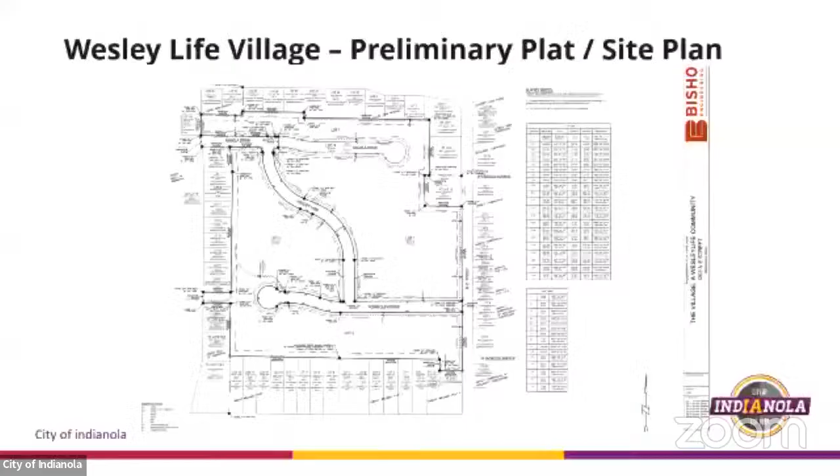Item 7A is approval of a preliminary plat for Wesley Life Village. The next two agenda items I'll be talking about together because they go hand in hand with one another. This is a request from Wesley Retirement Services Incorporated, represented by David Bentz with Bishop Engineering. The applicant is requesting approval of a preliminary plat and site plan for a residential facility, a group living facility at 1203 North E Street. The property is just over 33 acres in area.

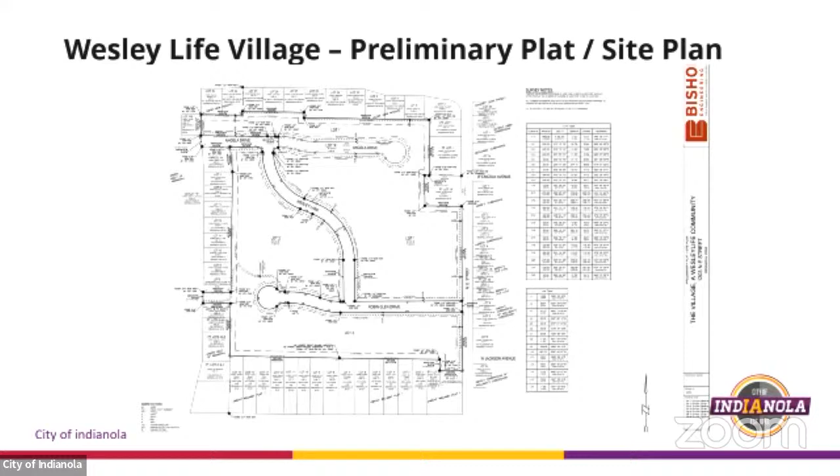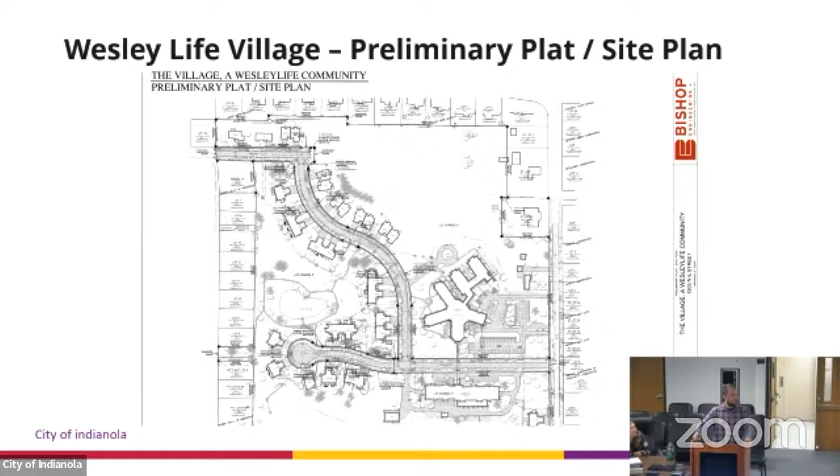The property is currently zoned PUD, and it is surrounded on all four sides by R1 single family residential. The site plan identifies the extension of one public street, Angela Street, which will be extended to the east. That will be the location for 14 duplex buildings for 28 total lots.

Each unit will be approximately 2,350 square feet in area. The site plan also identifies improvements to the existing facility to the south, which includes a new front entrance and a community room with cafe seating, just over 4,000 square feet in area. A 540 square foot area will be the new entrance.

Along the west side of the building will be a 10-unit transitional care addition that's 5,818 square feet in area, and a dining deck addition that's just over 1,200 square feet. Lastly, the applicant is developing a 3-story apartment complex at the south portion of the site, with 28 units, just under 20,000 square feet in area.

The lower level of that building includes 36 parking stalls. The trash enclosure is located in this general vicinity. The applicant is also proposing amenities such as a pickleball court, a dog park, a patio adjacent to the gardening area, and a bocce court as well.

Access to the site will be included in a number of different ways, including from Angela Street and then E Street on the east side of the site. Robin Glen is the north-south street that goes between, or kind of through, the facility there.

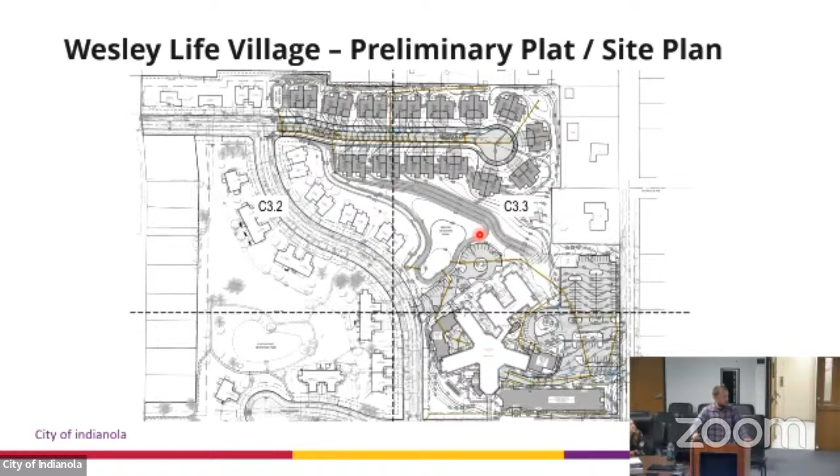Stormwater detention will be located in a pond at the center part of the site. A minimum of 25% of the project area is required to be open space, and they're providing 63.4% open space.

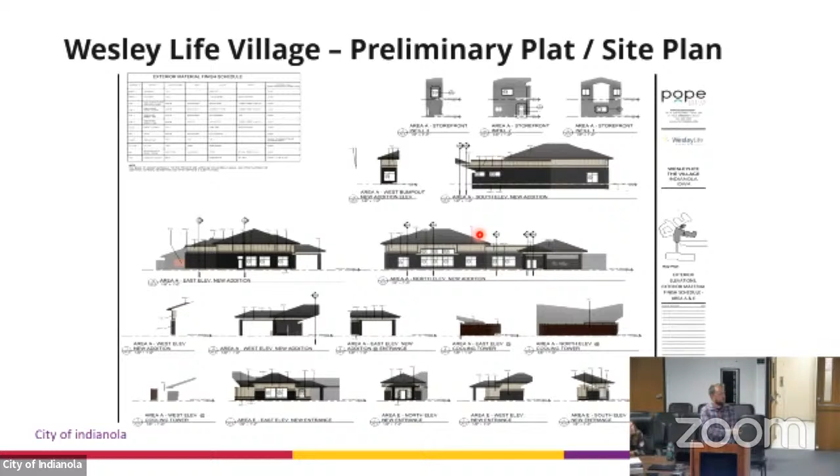The landscape plan is there. Colored elevations were provided for review. Those buildings are to be constructed predominantly of brick, fiber cement board horizontal siding, fiber cement board and batten, and fiber cement board panel, along with fenestration or windows. I've included some elevations for review as well.

And that's the apartment complex on the south side of the site. The site plan is in general conformance with our subdivision ordinance, zoning ordinance, site plan ordinance, and comprehensive plan, so staff does recommend approval. All comments have been addressed at this point, so there's nothing additional needed from an engineering perspective to complete the project. Staff recommends approval. We're happy to take any questions.

For the architect, developer, or representative, have you been talking to your neighbors? Any?

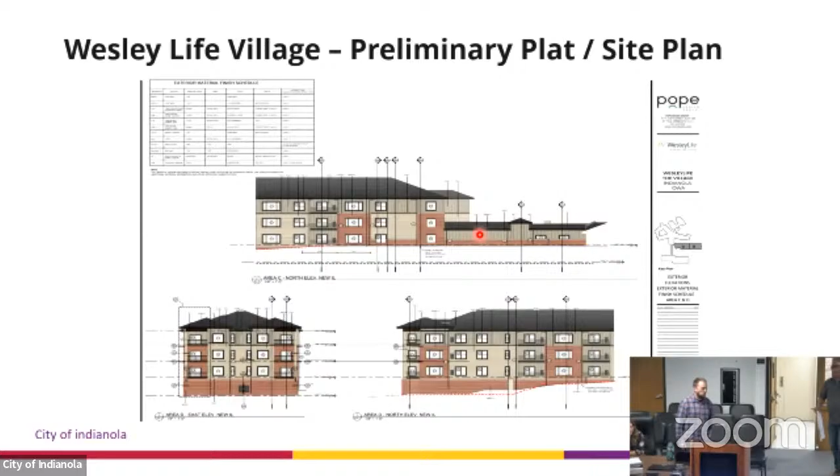Dave Bentz, Bishop Engineering, 3501 104th Street in Urbandale. Yeah, when we did the rezoning, we had neighborhood meetings. We came here about a year ago with a more intensive plan, and the neighbors showed up. When we came back through the whole process, we had another neighborhood meeting and pared it back a little bit. So yeah, we've had a lot of conversations with the neighbors, and I think this is pretty much in conformance with what we had for the PUD.

Can you tell me something about the water flow into those retention basins and where the water is ultimately going to go? It pretty much goes the same way it goes today. The south end that flows off undetained today, we've decreased that area, so there's going to be less water flowing off undetained. The large detention basin there, where that pinkish dot is, let me come over here.

Right now you have a pretty good sized area flowing off this way. We've decreased that, so you've got a smaller area, and we're detaining it. Then it's flowing down that road. You've got a lot of water that comes down through here, so we're over-detaining in this area, releasing less than what goes off today, and then it goes through this pond, out the way it goes today.

That's a dry pond, so to speak. This one's dry, this basin's dry, this one's wet. And the north one? That's a dry one. Okay, thank you.

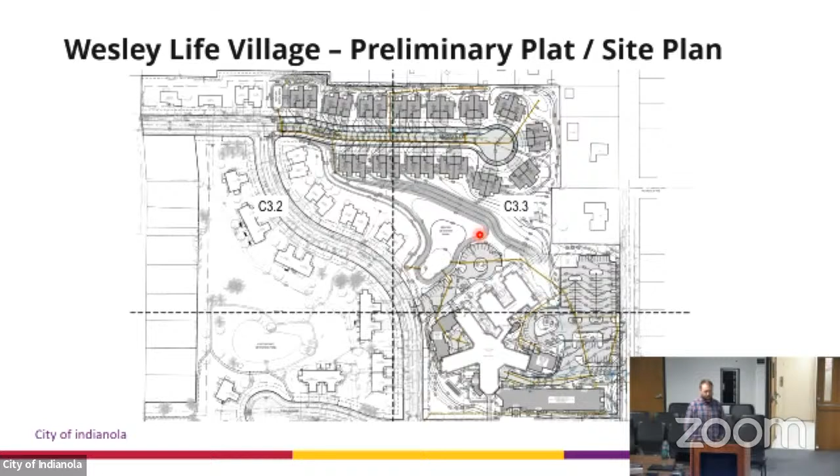Comments from the commission? On the original plan, there were some comments, particularly from the neighbors to the north, about the height of buildings. How tall are they going to be, those duplexes?

If it says on the elevations here... I don't know. I'm Troy Porter, I work for Wesley Life. Please go to the mic. The duplexes won't show up on the elevations, but they're all single story. Excuse me? They're all single story. Okay.

Anyone like to make a motion to approve the preliminary plat for Wesley Life Village? I make a motion to approve the preliminary plat. I'll second. Roll call vote, please: Richie, yes. Harris, yes. Darling, yes. Vice, yes. Nate, yes. And Piper, yes.

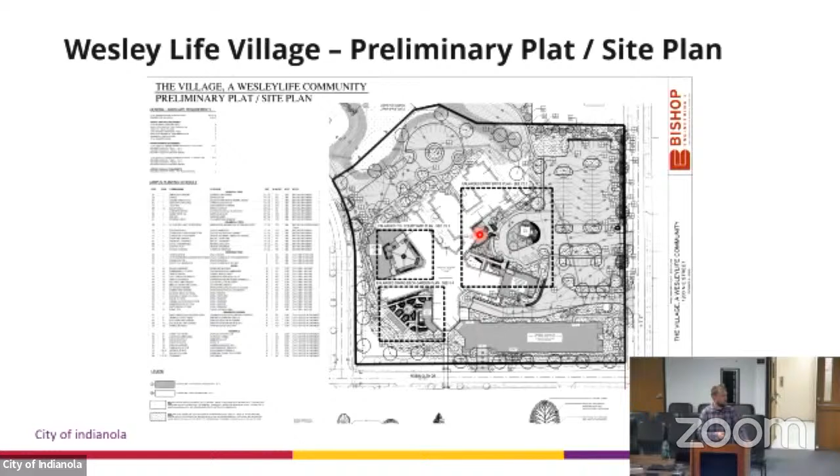Okay. So we agreed with the neighbors to do some extra plantings here that weren't really required since it's residential to residential, but we did that along here too. And I think originally we had a road coming down through here, which was a concern, and we still kept those trees in even though we removed the road.

Yeah, there'll be a punch list at the end, will they all be in that exact spot? Can't guarantee it, but I would hope so. A lot of times they don't have them staked out, so they're not exact. So we'll perform a landscape inspection as part of the process for them to get a CO.

We'll make sure all the trees and shrubs are in place at that time. This wasn't a city requirement, but the residents currently living here that are part of Wesley wanted some more screening too, so we added some, kind of like what we did up here, in the back of those units. They want the additional screening there too. That was just an internal Wesley conversation. Those are the existing Wesley units, yeah, right, they're just internal, we did the same screening between units.

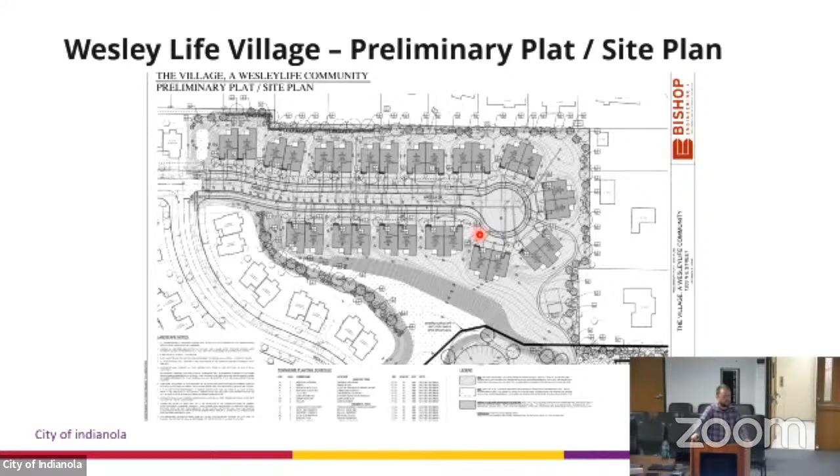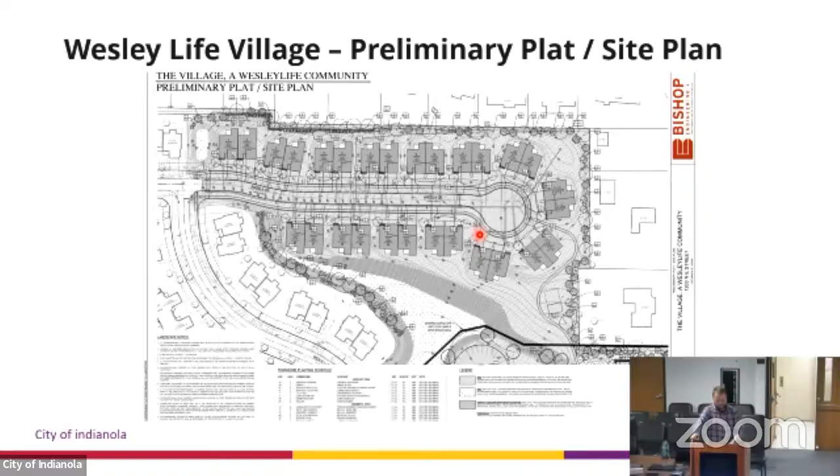There is a list of acceptable trees, is that correct? We list all the species here. That's hard to read, how many they are. I can't read them either. Looks like there's more list than that. We can send a detailed list. Just so they're not all the same species, so they all die at the same time. No, there's a mix of evergreen, overstory, understory typically, so.

Would anyone like to make a motion to approve? I move to recommend approval of the site plan for Wesley Life Village. Second that? Piper, yes. Nate, yes. Vice, yes. Darling, yes. Harris, yes. And Richie, yes.

Thank you, thank you. With the, thanks. I'll get you that list of trees. They won't all be elm trees. I'm good, not all ash.

With the completion of new business, we'll move on to item number 8, which is comments, and 8A is any building permit report updates. Either of you have those tonight? I included the reports from July and August. I don't know if you have any questions, but.

And updates on current projects you'd like to share? We're still working through some comments with the Emerald Bay project and the Kentucky Ridge Townhome project. We recently had submitted a site plan, the first site plan for the Emerald Bay project. So hopefully comments are pretty minimal on the first review, so hopefully by the first October meeting we'll have that before you guys. They're looking to get moving on that one pretty quickly. So we've been having meetings with those folks, the site plan folks, as well as the preliminary plat people who are putting that together.